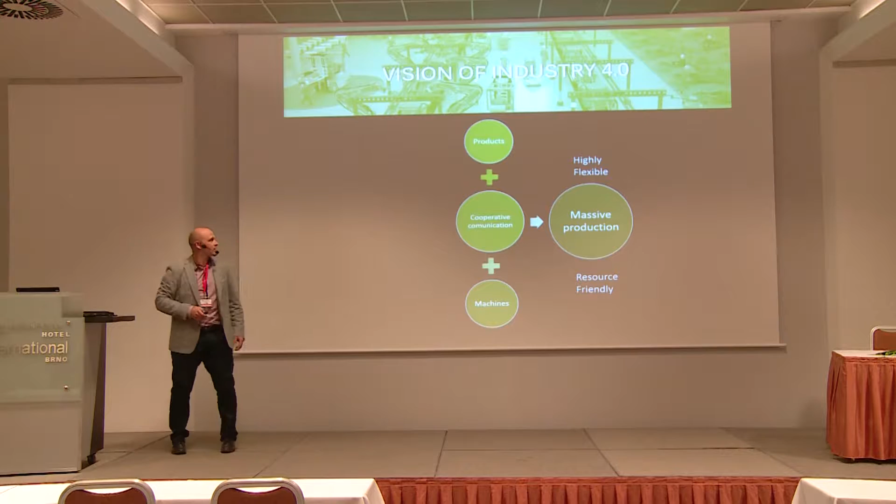So let's start with some terms and introduction. What actually is the vision of Industry 4.0 and what is it all about? The term Industry 4.0 refers to an early stage or further development for industries where products find their way through the production process, imagined in intelligent factories and intelligent industries of the future. Products and machines are going to communicate with each other.

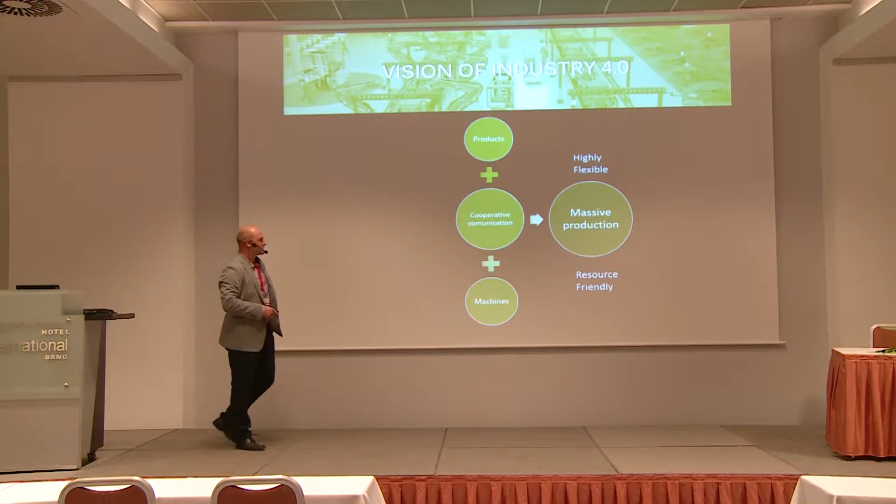So the vision of the phenomenon of Industry 4.0 is to build up highly flexible and resource-friendly massive production, which will in the future be able to reflect the demanding and hungry markets which are coming.

Let me start from the history, because if I'm talking about a revolution called Industry 4.0, it should be mentioned why 4.0 and what came before. It was mid-18th century where the first intelligent usage of hydropower was introduced, and such utilization revolutionized production. So that was revolution Industry 1.0.

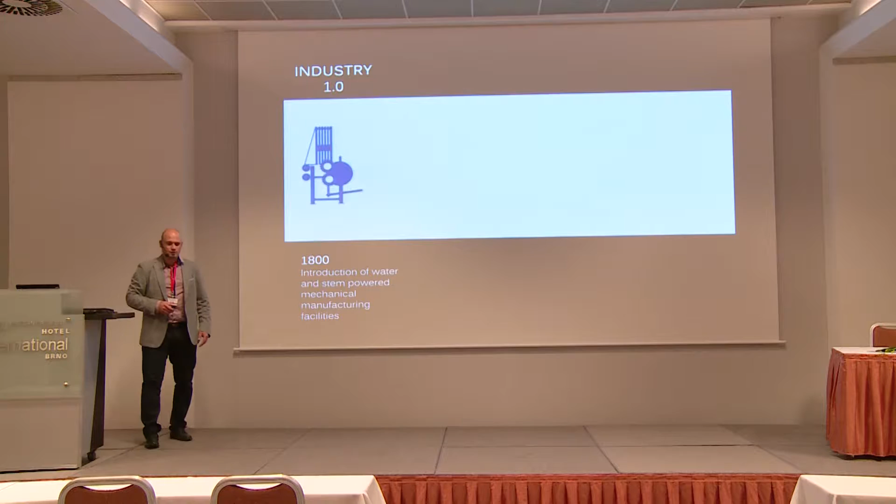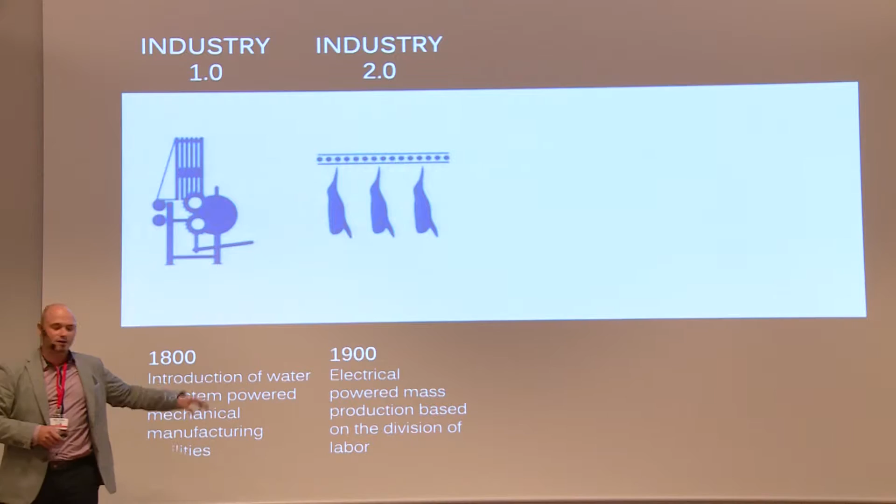At the end of the 19th century, there was the first conveyor in production in industry, and also some division of labor work started. So this stage we can call Industry 2.0.

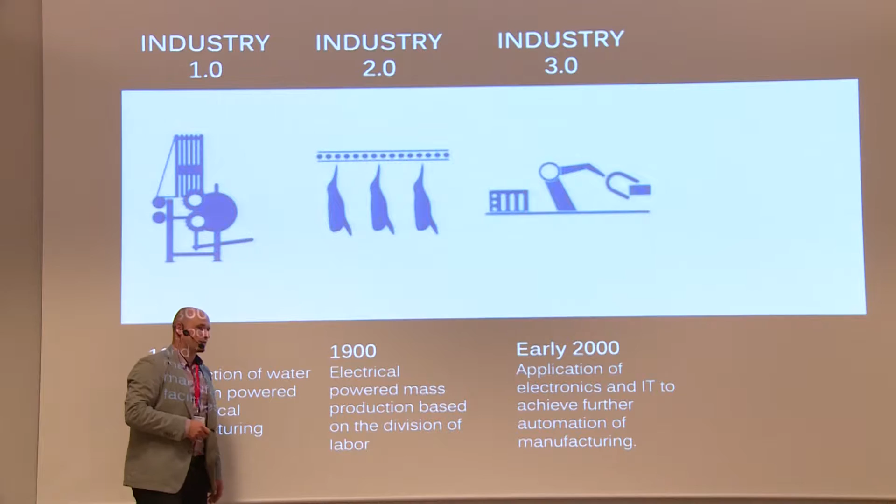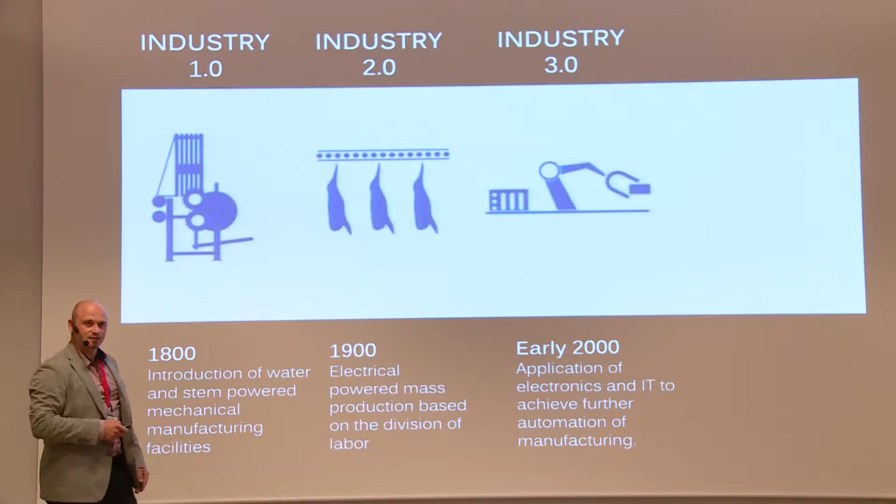After computers came, in the mid 1970s, the first computers started driving the labor and driving the conveyors, with the objective to speed up the production process. So there was a massive introduction and implementation of electronics and IT to achieve the goal of speeding up and achieving massive production in the production industries.

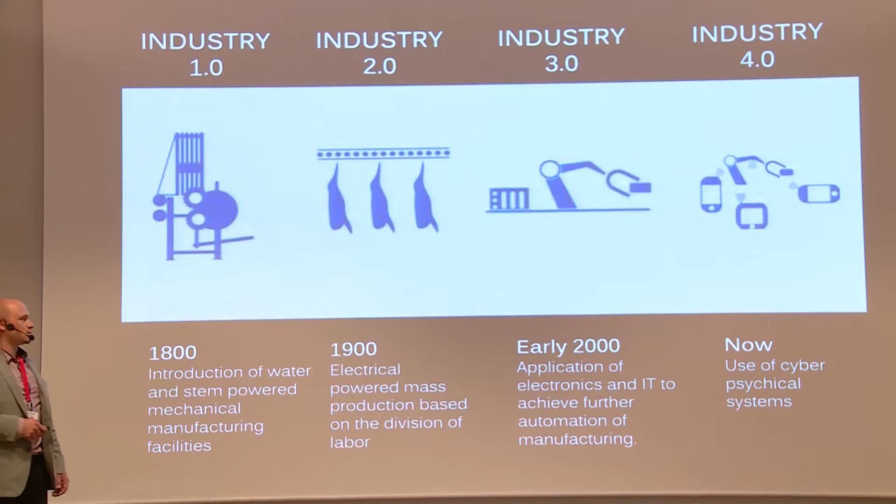And here we come to Industry 4.0, using cyber physical systems, the IoT, data streams and data mining to achieve the vision of Industry 4.0 — meaning all products and machines communicating with each other to build up that highly flexible and resource-friendly massive production. However, as industry vendors and partners say, Industry 4.0 is still a vision, and it will come to the real world within the next 20 years.

So it's expected that by 2030 there will be cyber physical systems which control all the components in the factory. Industry 4.0 is a topic I will keep repeating during my talk.

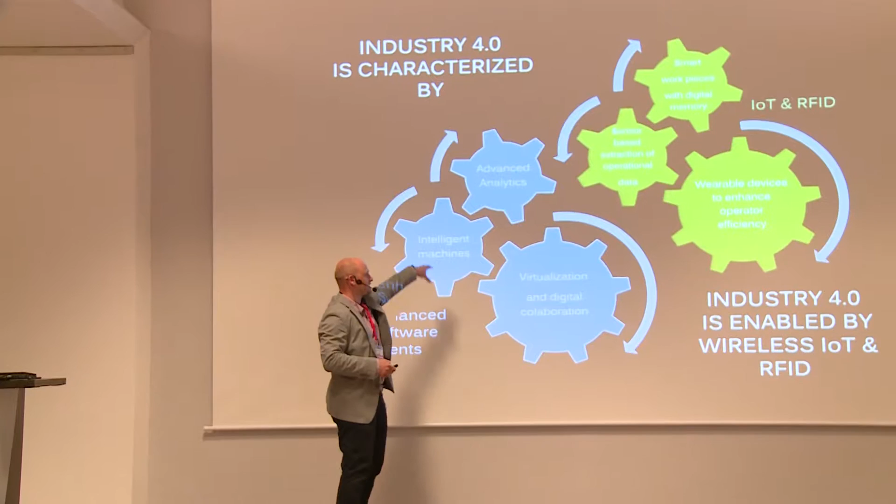On the other hand, we cannot come to Industry 4.0 if we have no communication and no data, because somebody needs to process the data. Those blue blocks are able to process the data, but we need something which is going to generate data and something which is going to process it.

That's why I try to distinguish these two sets of blocks with colors, and since our company's color is green, I use green because this is actually what we are doing in our startup, in our company. We are building IoT and RFID systems for industry, to allow machines, products, and operators to talk to each other and cooperatively drive production.

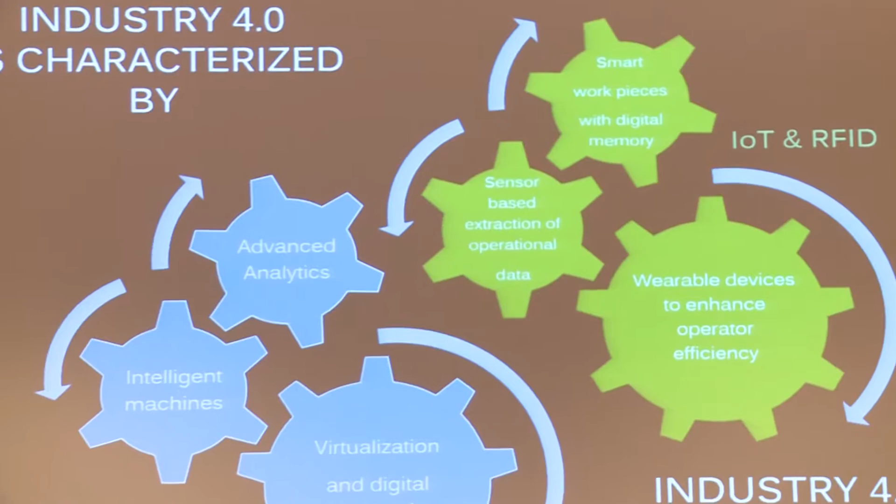So without sensor-based extraction of operational data, and without smart work pieces which embed some operational memory, no intelligence, no communication, and no data storage is enabled in the industry.

Everything is about the well-known term Internet of Things, Internet of Everything, Internet of Services. True or not, this is just RFID. Everybody's talking about IoT, but most IoT solutions are just poor RFID systems. Doesn't matter if we're talking about passive or active RFID, it's just radio frequency communication. In the future, all components in the smart factory will talk wirelessly, because there's a mobile fashion in industry, because everybody will be integrated in the IoT revolution.

So my speech was about leveraging indoor positioning to enable Industry 4.0 revolution in active RFID systems. Nowadays, lots of companies deal with offering, developing, and delivering active RFID solutions. I mean some components which are active - wireless components which communicate thanks to batteries integrated inside. The product can communicate itself without any launching of any operation, because it has a battery, and it's an active RFID system.

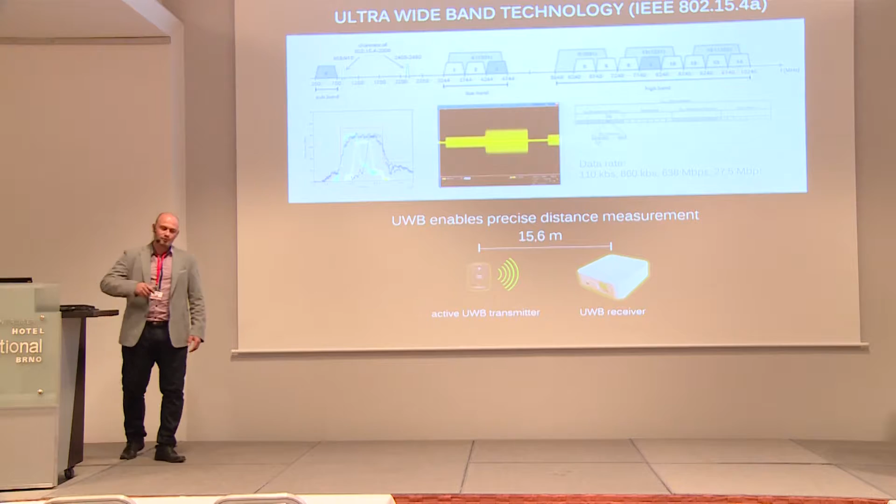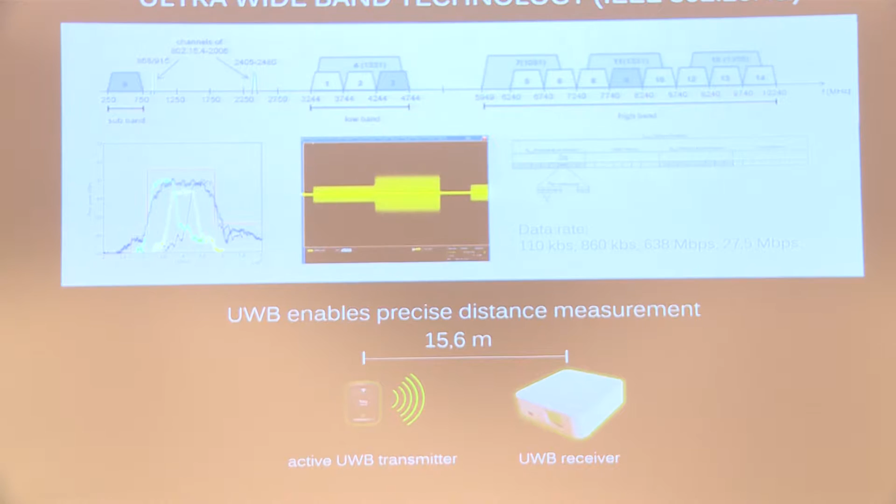I mentioned in the previous slide an abbreviation called ultra wideband. Maybe some of you know it, some not. Let me do some introduction - what is ultra wideband, which we used in our products?

We do not build products on nowadays technologies such as Wi-Fi, Zigbee, Bluetooth, WiMAX, ISA100.11a. We went further and tried to integrate, tried to develop a solution or radio RFID technology which brings something more - something beside identification - and that something beside is the ranging and indoor positioning feature.

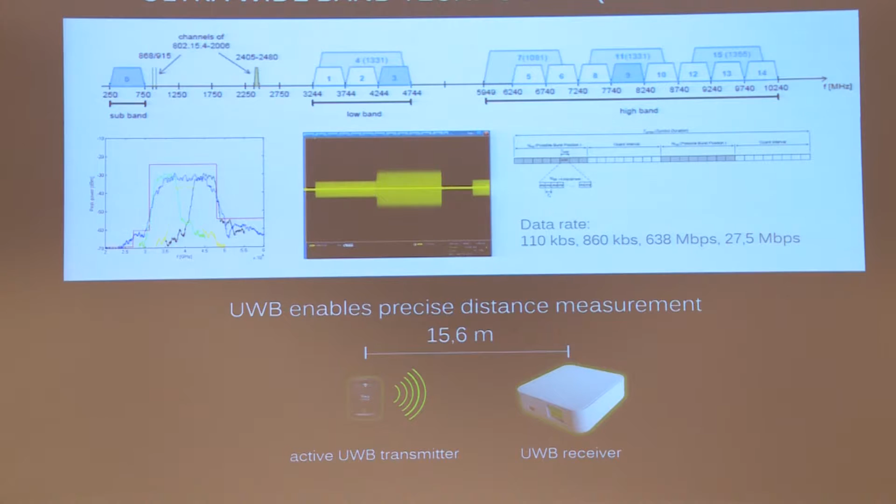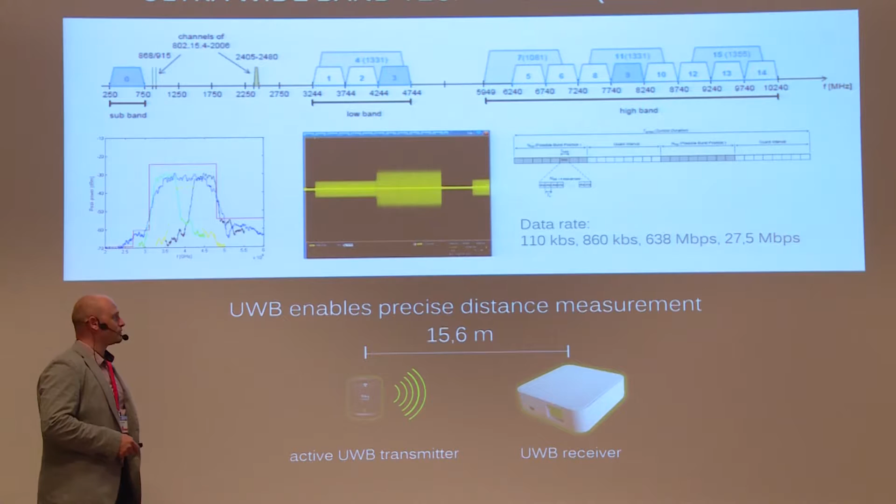Ultra wideband technology is nothing else than a common standard from IEEE, referred to as IEEE 802.15.4 Amendment A. You know 15.4 is Zigbee. There's an amendment from 2007 which defines application of different radios on the physical layer - not narrowband radios, but absolutely ultra wideband radios with a channel width of 500 megahertz.

This width of the channel allows this radio to transmit very short signals with a length of 2 nanoseconds. So if you imagine you have a channel with a width of 500 megahertz, you divide it, you have the signals, you have the pulses, which are 2 nanoseconds wide. And what is it good for? I will come to the benefits and advantages of such a solution later on, but let me come back to some definitions,

or maybe some parameters of ultra-wideband radios. It communicates in the gigahertz bands, starting from 3.2 gigahertz, going over 4 to 7, up to the 10 gigahertz band. And if you compare classical narrowband signals, which you can find in your Wi-Fi, your laptop, your microwave, your DECT phone, the channel of ultra-wideband technology is more than 20 times wider.

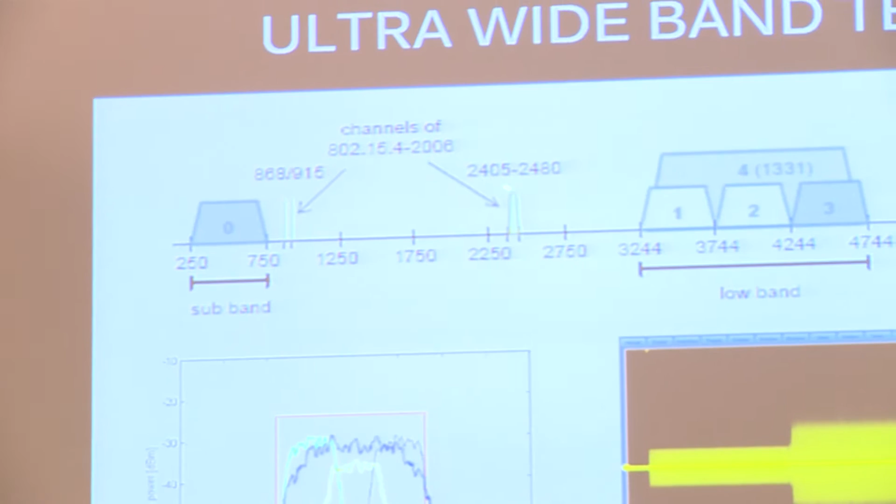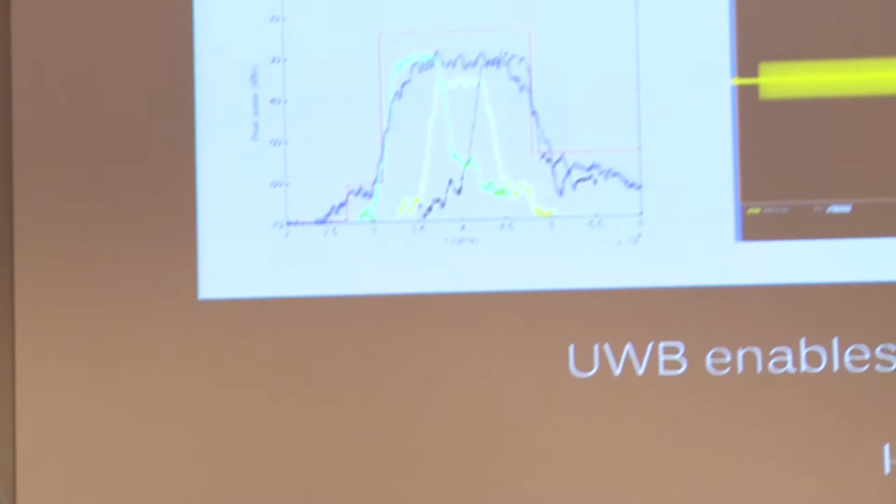And because there is a spectral density need, we need to comply with some legislation. So ultra-wideband technology cannot go higher than or on the same power level as today's narrowband communication technologies. So the power level of ultra-wideband technology is under the noise in order to comply with the spectral density legislation or requirements. That's why you cannot interfere.

You can go to the band where Wi-Fi, microwave or DECT phones communicate, but if you go under the noise, you cannot interfere. Also, this standard was generally not released to build up localization. It was not released to build up ranging. It was released to have a low power solution which enables high data rates.

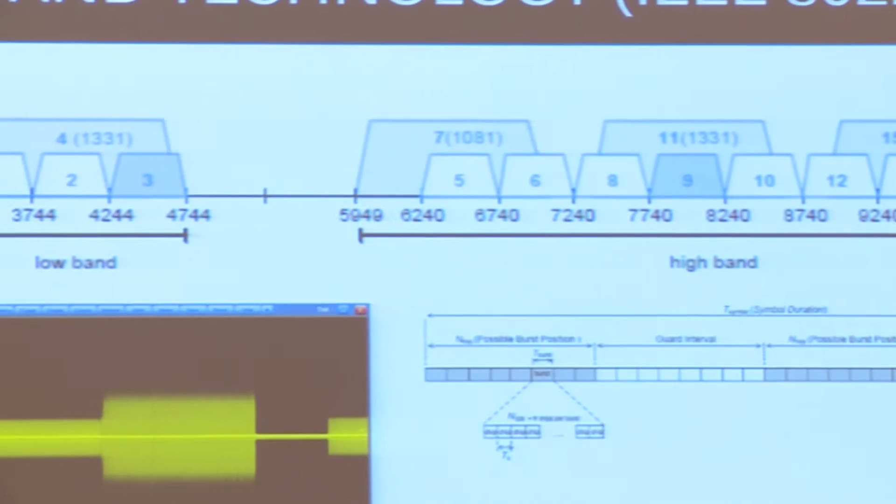And that's true, because if you imagine you have 2 nanosecond impulses, where you can get with the data rate. So there are 4 data rates defined in the standard IEEE 802.15.4a, starting from 110 kilobits per second, which equals Zigbee. We can go up to 1 megabit, to 6 megabits, up to 27 megabits per second.

And such a standard has a really beneficial feature. It's not only about the high data rates, but since it transmits very short 2 nanosecond impulses, if you are able to process such impulses and to separate and filter the first one, you are ensured that you are receiving the direct one, not a reflection. If you have an active ultra-wideband transmitter and a receiver, you are able to precisely measure the distance between the two devices, between transmitter and receiver.

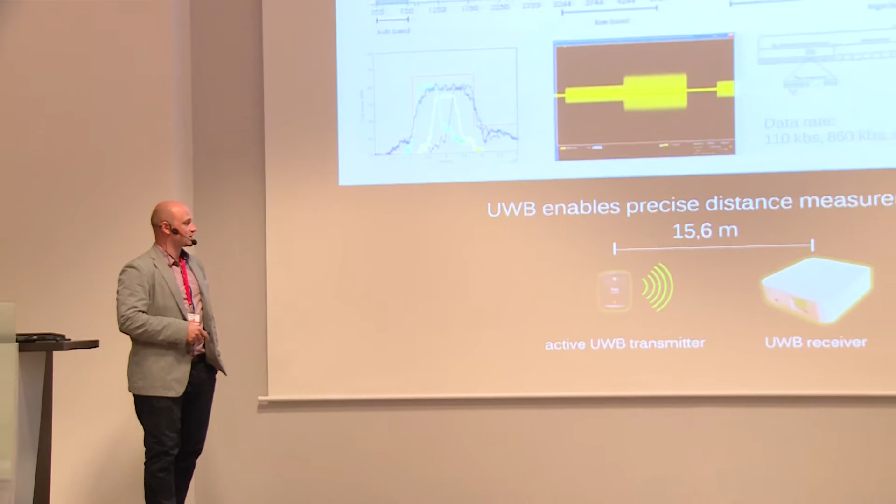So ultra-wideband really enables precise distance measurement which does not rely on RSSI, signal strength or power level, which is affected by moving people, temperature, and obstacles. To enable real-time location systems, industrial positioning, or ranging, you cannot rely on parameters easily affected by the nearby environment; you need to rely on a principle which measures the time of flight.

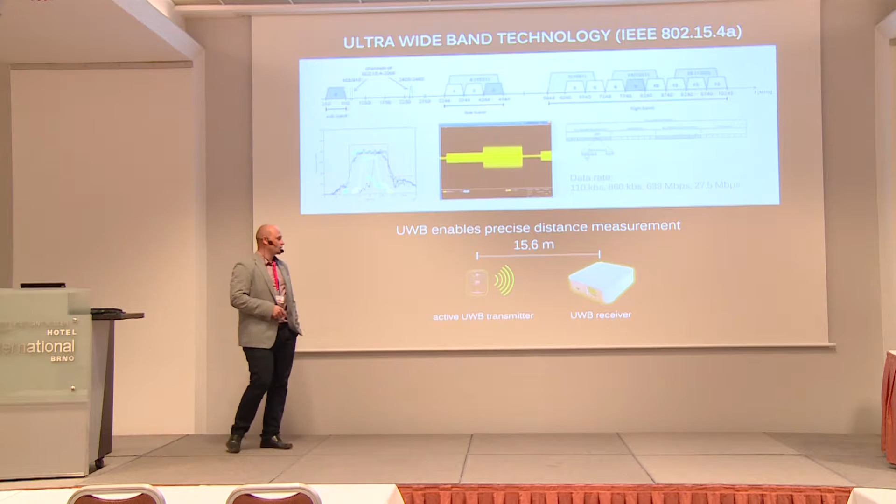So when the signal left the transmitter and when you receive it on the receiver's antenna, you know the timestamps, you do some averaging and filtering, and using time of flight or TDOA approaches, you can build up a wireless meter. You can take it in your pocket. You can put the active transmitter somewhere at the end of the room, take the receiver here or the laptop, and you know the precise distance. Actually, if we build a company on such an idea, we can already have customers.

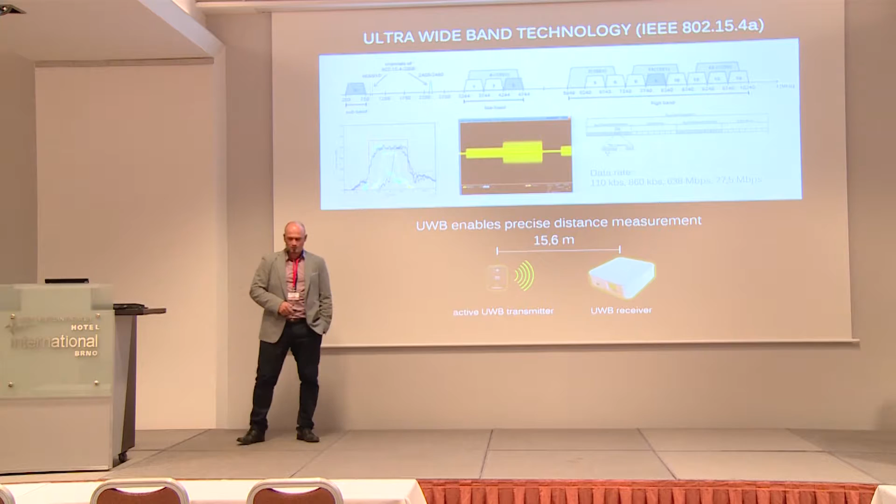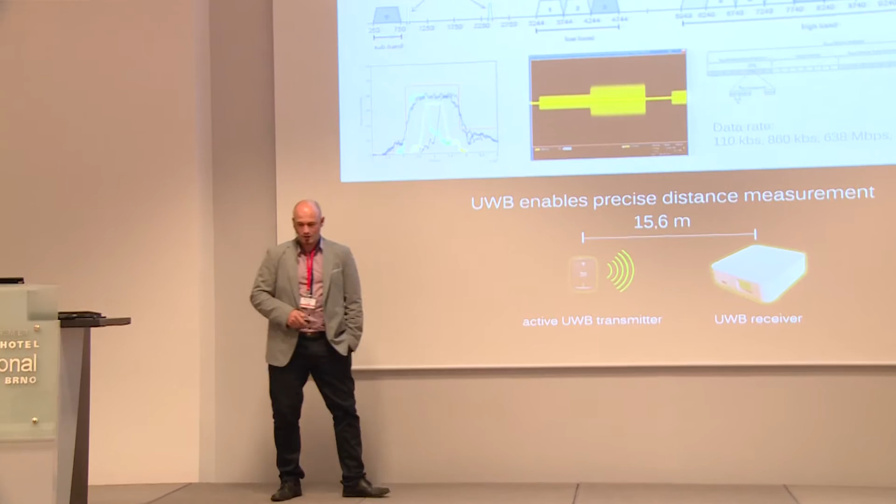For example, one funny story: we had a customer in Russia which built systems based on our components for planting trees. I mean, making the holes in the exact position without using any tape measure or laser ranger, just two guys going into the woods and putting the new trees in the exact position.

And I don't want to say that we invented something new, because who invented the tape measure was not Sewio, was not any company. It was Alvin Fellows who came up with the idea that it would be fine to have a tool able to measure distance easily. So it was Alvin Fellows who invented the tape measure in 1868.

And what we did at Sewio is take his idea and transfer it to the IoT manner, to the wireless expression, not using any tape, because we are not restricted by the length of the tape, but by the reading distance of the two components. And now, the idea: somebody has wireless ranging, a wireless meter, and how to enhance such a product to make a business and go to the market.

All of you who are doing research know something like this, the classical GPS principle: trilateration, multilateration, triangulation. It means once you are able to precisely measure the distance between two components, once you do it 3 times or 4 times, you can get the exact position of any active transmitter within the space. And that is finally the idea.

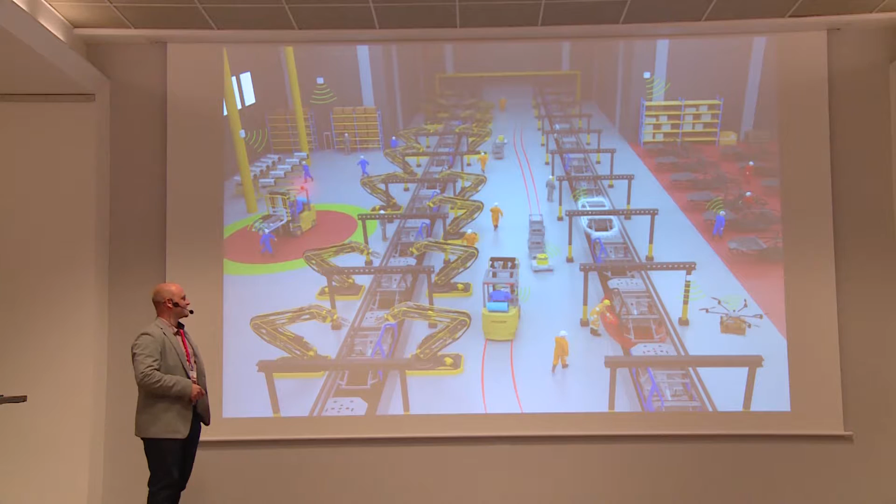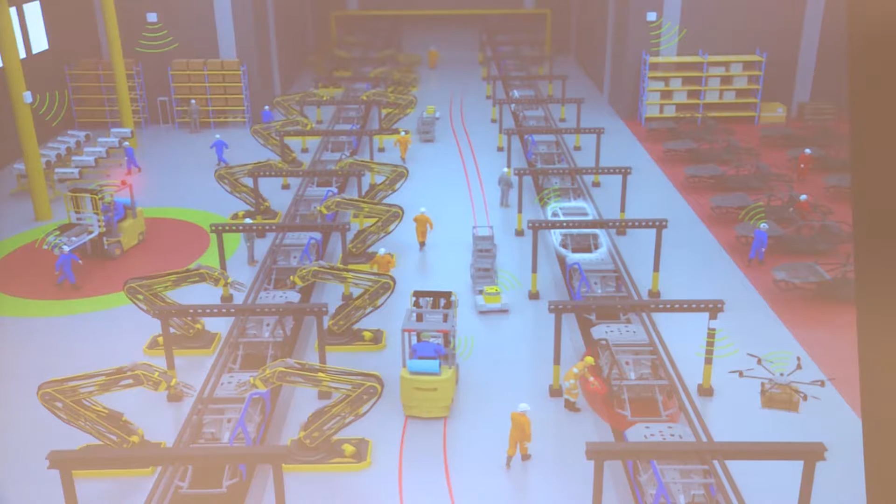And right now comes my favorite picture, which shows where we can apply industry positioning systems. I like this time when I can stand here and show that our products can be used in at least 7 parallel tasks. If you have one installation in the automotive hall, you can solve 7 parallel tasks with one infrastructure. What is necessary is to have as many active tags as objects you want to track, localize or navigate. I will stand on this slide, I think, 5 minutes.

I like to start from the left, where you can localize the forklift and the pedestrian working in the automotive hall. What you get? A safety system. The driver knows where the pedestrian is. I am not claiming that we are able to stop the forklift, because we are not a producer of forklifts, but we can install in the forklift an industry tablet which reports the position of the pedestrian passing around, and we can tell the driver, hey, be aware, a pedestrian is going to enter from behind the shelf within 5 seconds. You should slow down.

And there are already such solutions; for example, Linde, a big producer of logistic vehicles, shelves, and solutions, uses active RFID tags mounted in the floor. Once the forklift passes this active RFID tag and the reader reads the information, it means I am at the end of the shelf, I should slow down because there can be a pedestrian. So the first use case is you have a very nice safety system.

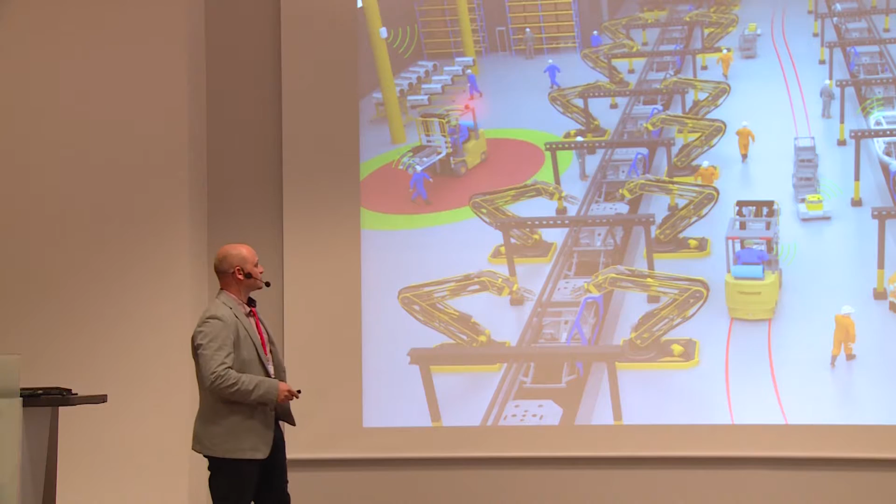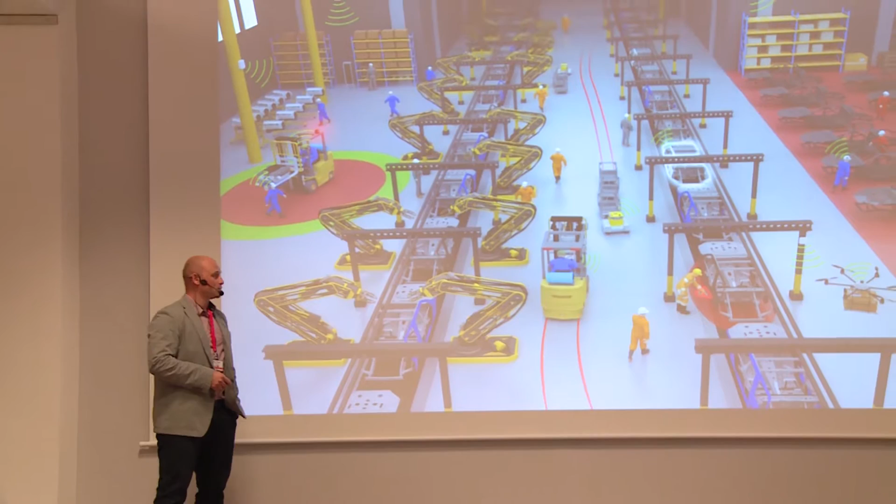The second one, I am coming to this side of the presentation. Just put the active tag on the product, and you know the absolute or relative position within the hall. What is it good for? You are the shift manager, and you are asked how many minutes it takes to finish the production of a car. You click into the tablet or the website, and thanks to data mining and the location positioning system you know that this car will be done within 22 minutes because each takt has an absolute time to be finished.

And when I talk about precise and absolute time, I'm talking about seconds. This car will not be in this takt more than 2 seconds deviation, because the products keep going along the conveyor. So you know how the product is moving. That was the second one.

Third one, I don't know if you have experience from production halls, mostly automotive halls. Nowadays, for delivering spare parts in automotive, they're using AGVs, automatic guided vehicles, which have trolleys that deliver the small parts to the operators, which should be mounted to the car.

Nowadays, you come to the assembly hall, and everywhere you see the magnetic stripes, which are used to navigate the AGV vehicles across the hall. And if you want to change the track of such an AGV, you need to take the strip out with the hammer, and you put the new metal or magnetic strip somewhere else. It takes 1-2 days to relocalize or renavigate all such robots or AGVs across the hall.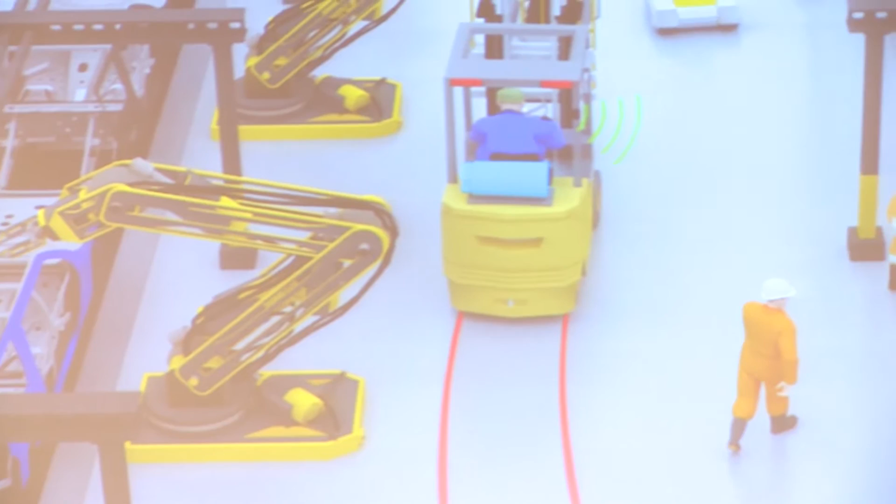Okay. The fourth one. Just imagine that you invested $1 million to buy new forklifts for your 5 assembly halls. And what you need to know is how often the forklifts go, where the forklift is, and who operates the forklift. Everything can be known again using an industrial positioning system. I know that nowadays all the forklifts have motor hours. You are aware of precise information, how many hours and how many meters each forklift passed,

but use cases and queries from our customers say finding one forklift in an industrial area can take 30 minutes, because the operator takes the radio and asks all the forklift operators in the proximity of the hall, and John answers, hey, that forklift I probably forgot in assembly hall M3. Okay, that operator goes to the hall, doesn't find it because he just missed it, and it can take 30 minutes to find it. Just imagine even if you save 30 minutes per day for such an automotive hall or automotive producer.

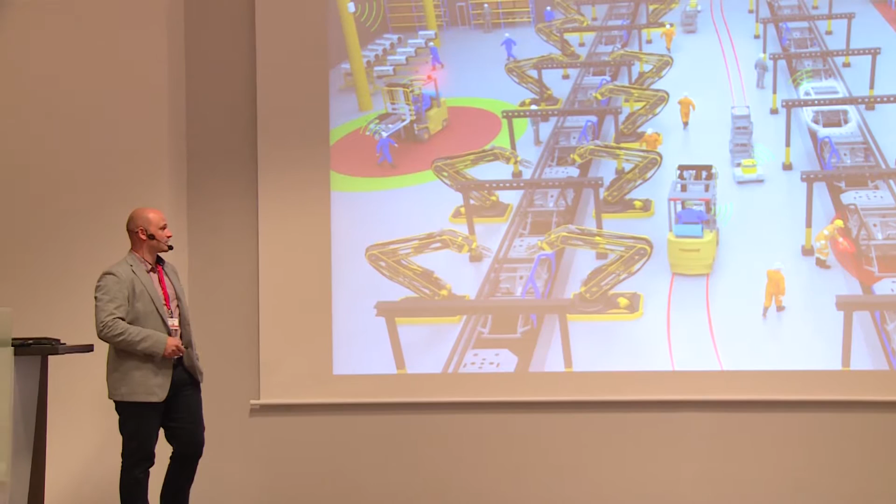I cannot transfer the time to money because I'm not a producer. I don't know what the charges are and what the budget is for one day, but 30 minutes per day is a lot.

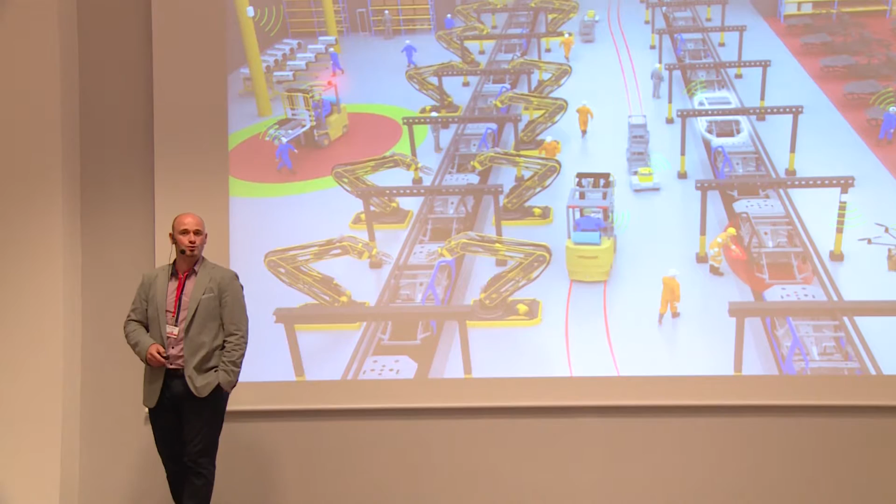The fifth one, we are claiming that we are able to produce zero fault tools. Zero fault means tools which will not produce any fault. I mean not the tool itself, but the operator who handles such a tool. Because imagine again the situation. You have the conveyor, where two different types of cars are being assembled. You have two types of drilling tool, which should, for example, drill some holes or work with some screw. Once you take the tool which is not correct and you go closer to a product which is not authorized with that tool,

again, we are not talking here about the industrial positioning system. We are talking about simple ranging. You are coming quite close to such a car, but you don't have the right tool. So thanks to ultra wideband technology, you are able to precisely measure distance. So once you get to about 1 meter distance from such a car, you are able to remotely switch off the tool. And once you get far, you can turn it on. And it's not your task; it's the task of the tool, which simply controls the battery based on the distance. This was the fifth one.

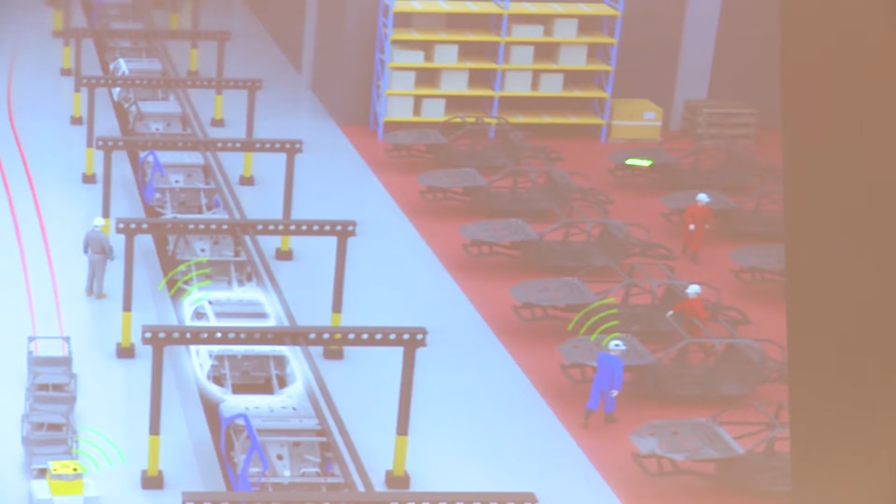I'm going to the last two. Entrance and exit management of zones. Just imagine a very nice situation. We have three teams in the automotive hall: blue guys, yellow guys, and red guys. And the blue guy is not allowed to enter the zone which is authorized only for the red guys, because he doesn't have that level of certification or authorization, doesn't matter what, but he should not enter here. He doesn't know, there is no physical fence. This red area is just coordinates in a MySQL database, for example.

Because what is zone management about? It is about comparing the actual position of the pedestrian or worker with the position of the zone which management defined. So once the blue guy enters the unauthorized zone, the management of the factory can be notified, the log can be saved, even the Twitter or Facebook status can be changed. So everything is up to the customer, how he wants to reflect such a situation.

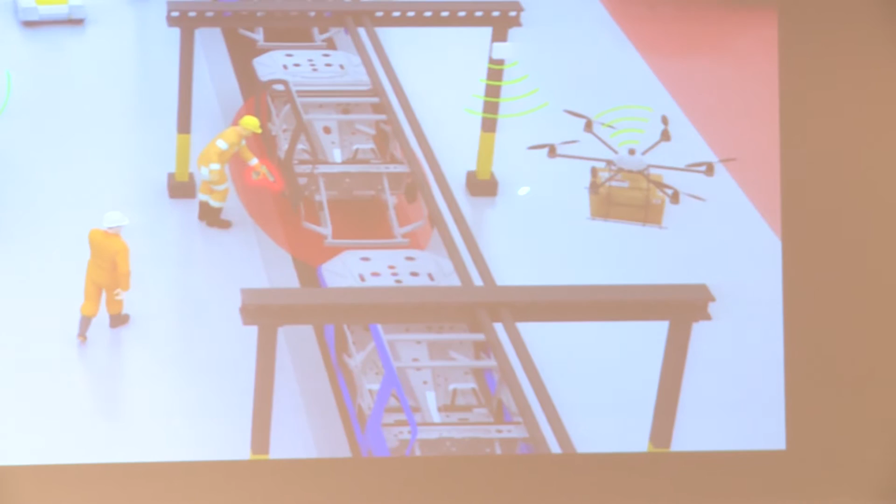And everybody knows, you can read it in the newspapers, hear it in the news, on television, read it on Facebook even, that drones, mostly nowadays when we have some migration issues, are going to be used often. It has already reached its mature state. And when I was talking with one guy from the automotive industry, he told me innovation equals drones.

The drones are going to do not most of the task, but a significant part of the task of the operators and of the robots. So I am happy that I can claim that we are trying to be the first company, at least in the Czech Republic, which will be able within 6 months to navigate drones under the roof, inside of the hall, without any control, using only industry positioning systems.

Nowadays, maybe you will laugh, but the big automotive producers, I think that Volkswagen will take a look at this as well, mostly because of the current situation with Volkswagen. But some automotives and partners wish to have small drones equipped with cameras and a laser meter to do automated inventory tasks.

You can imagine that you have the pallets which are stacked in columns, and if you are able to navigate the drones over the columns of the pallets, by measuring the reflection of the laser, you can simply calculate the pallets, and you can do it 10 times per day without any operator. That's a shame, I know the operator has no job, but it's Industry 4.0.

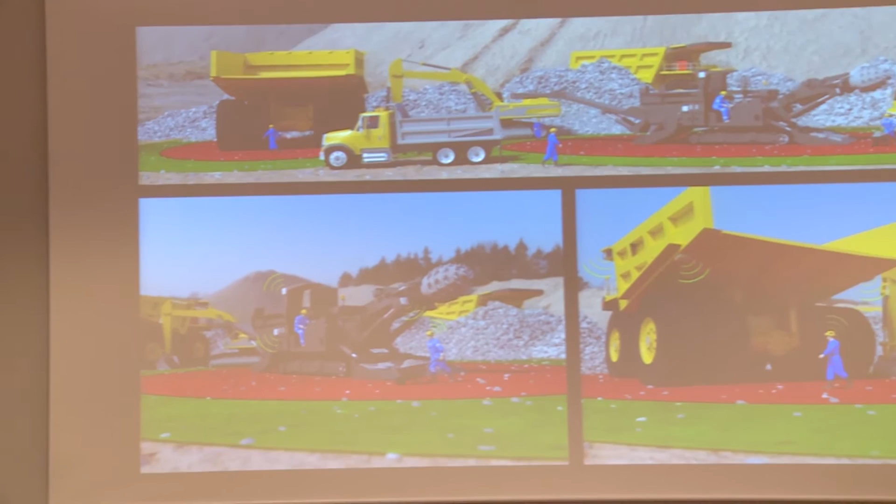So in the mining and construction industry, we are reflecting the demands of the customers, not to localize the people, but to protect them. Maybe you're asking, can you make a business on protecting people? You can, because any injury in production, in construction, increases the price of such construction. Once per month a guy comes and checks how many injuries happened on the construction, and more injuries increase the price, for example in a mining task. If you are able to reduce the number of injuries during the shift, you are able to decrease the money you need for such construction. So again, it is about saving money.

When I'm talking with customers, I often use a quote which reflects and introduces what we are doing in Sewio. I'm claiming that with Sewio products we can save life and save money. It means, yes, we can save life, and even if we save life, we are saving money, because you don't need to invest so much money for the workers working around the machines.

So another use case, I think it is the last one. Before I go to the last one, imagine that you have one product which is ready for industrial positioning inside halls, under roofs. I mean, it's not waterproof, it's not vibration resistant.

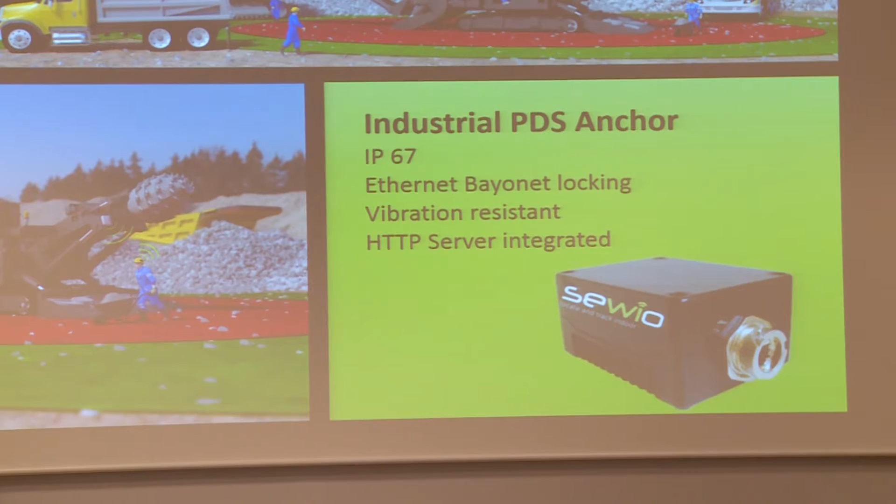We know it is vibration resistant because it's been working more than 3 months in Italy, and each component has an HTTP server integrated. It means you can go to your living room in the evening when you're drinking wine, open your laptop, and if you have an internet connection, you can connect to such an anchor, for example this anchor, set up new zones, and download the log from the anchor to see what happened during the shift. And for example, you can reconfigure the diameter of each zone.

Generally, by default, we deliver those mining anchors with 3 zones: a notification zone, warning zone, and danger zone. For each zone, you can remotely, through the HTTP command, set up the event - what should happen. If you're in the notification zone, the machine should just light up. If you're in the warning zone, the machine should start a horn to notify you're too close. If you're finally in the danger zone, the machine should stop the work.

It's nothing sophisticated, it's just switching of the relay of the power cable. That's all, because you need to save the life of the operator.

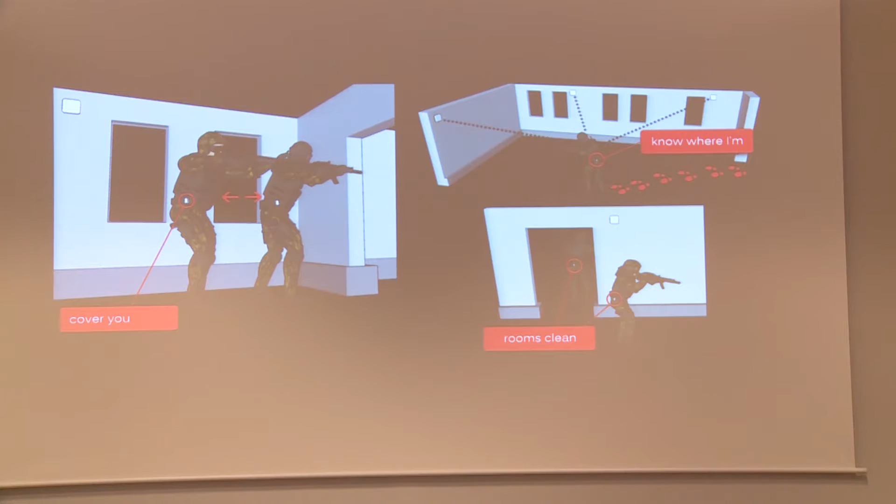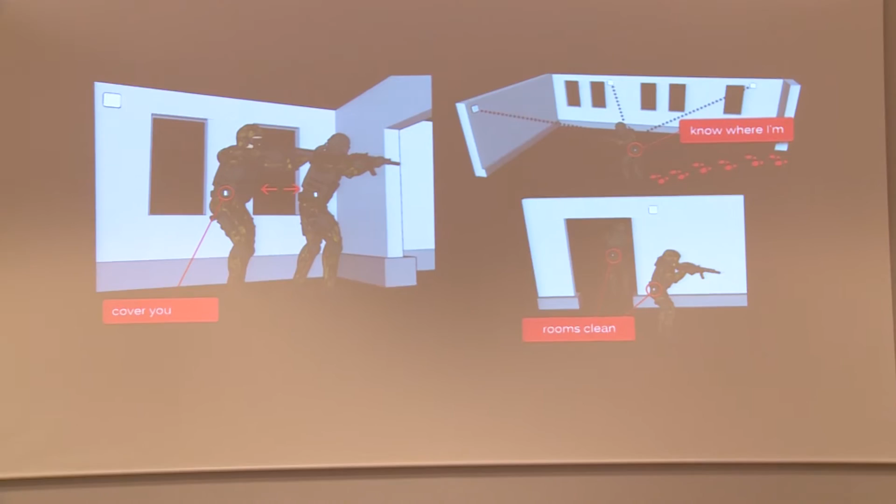The last use case I'm going to mention is entertainment, sport, and training centers, which leverage the benefits of the indoor positioning system. It's not just army - it can be firemen, police, which have training centers in each region. Imagine each soldier equipped with an active transmitter, generating lots of information which allows you to do statistics and know what was wrong during the training. You know how far you are from your colleague, if a room is occupied, and if all the rooms are occupied with the army guys. It's not just about coordination inside the training halls.

It is also about sports centers. We have one customer who built a big center from European money, which is a center of excellence for health, style, and sport activities, using these systems for monitoring the behavior of the people or team members during 30-minute training sessions. We can show that customer, that excellence center of sports, how the members of the team behave during the training.

Okay, that's some brief overview, I should slowly finish. Maybe if you're provided with such a presentation, it's too easy a task - I don't care. So you can read just about the common principle of how this system works.

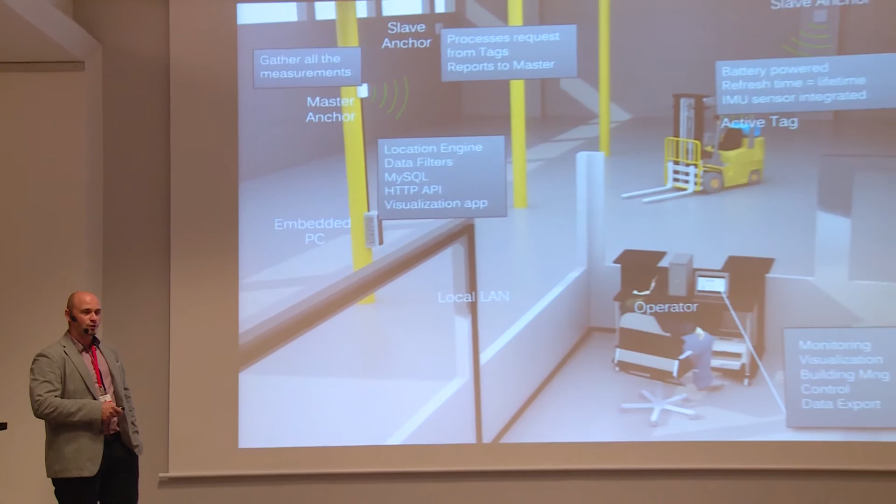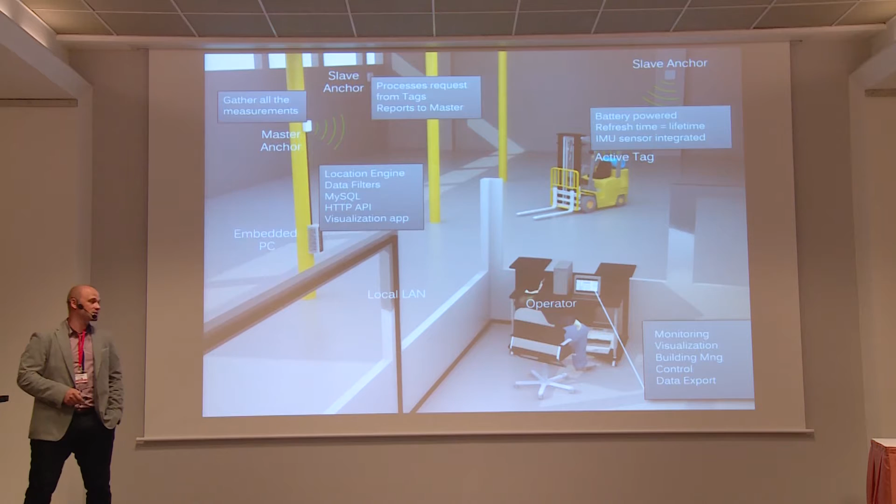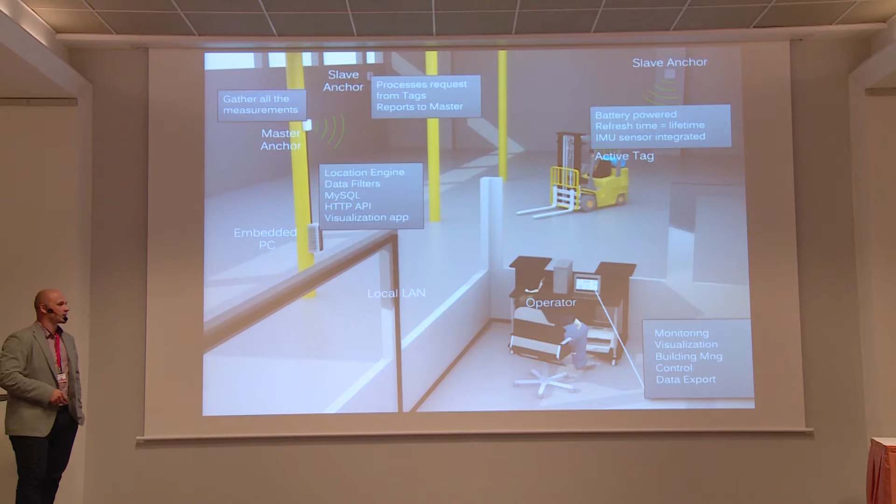You have some anchors, you have some tags, slave anchors, master anchors. Slave anchors simply measure the distance from the active tags and pass that information to the master anchor. The master anchor passes that information to an embedded PC or server, which runs the location engine, visualization, HTTP, MySQL, data filtering, and provides this information through the local LAN to the operator, who can use HTTP to monitor all situations in real time or in the past, with monitoring of the object, visualization, building management. He can build as many buildings as he needs, doing control and data export. So this is the general principle of how nowadays location positioning systems work.

For such scenarios, for automotive, we have a solution we call RTLS kit, which has the anchors and the tags - maybe you can't see because they're black. The customers are provided with a solution which is easy for installation and able to cover 2,000 square meters, and they can do it by themselves within 1 hour.

Go to Google, check iBeacon. You can order it, and you can do absolutely the same task as we do with the ultra wideband system - you can deploy all the iBeacons over the hall, and using your phone with Bluetooth enabled, you can see the position of your mobile phone, but with an accuracy of 2-3 meters.

This year, Amper 2015 Brno had lots of use cases and companies showing Bluetooth applications for customers' phones, and we were testing with them as well. We know that the precision of all technologies which rely on signal strength - Bluetooth, Wi-Fi, or anything else - cannot go as precisely as time of flight, which is used by ultra wideband.